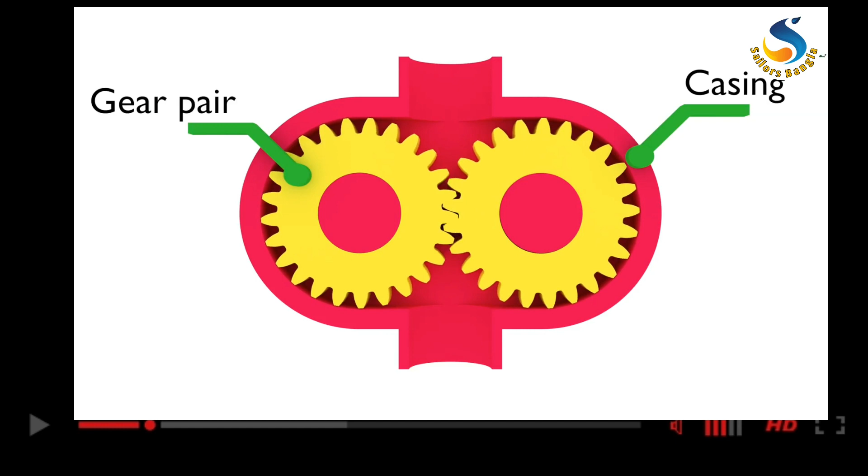Next is the gear pair. These gears may be spur gears, helical gears, or herringbone gears. Helical and herringbone gears always have more flow at high speed compared with spur gears. This gear pair is externally meshed, of which one is the driver gear, mounted on the shaft of the prime mover, and the other is the driven gear. The last part is ports.

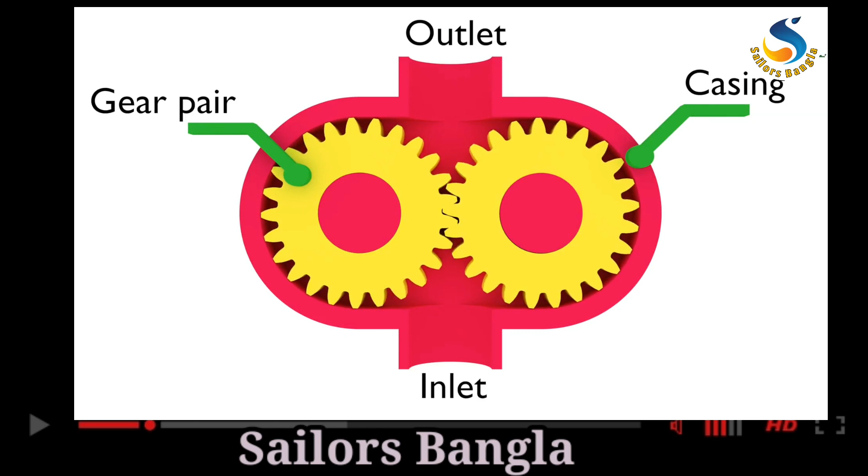For suction of oil into the pump, the suction or inlet port is provided. The delivery port is provided to supply high pressure oil. These two ports are located on opposite sides of the gear case. Well, now let us see how it works.

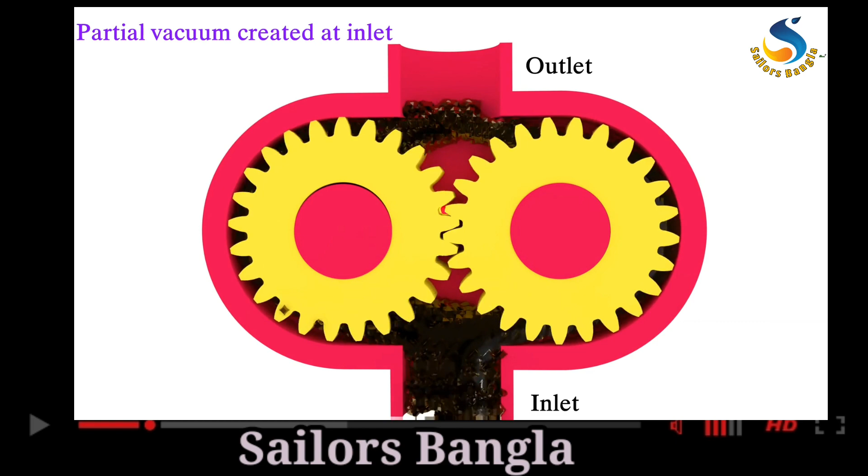When the motor or prime mover is started, it will rotate the driver gear and then the driven gear. The unmeshing of the rotating gears takes place at the inlet, due to which volume increases and a partial vacuum is created. So the oil present at atmospheric pressure will enter the pump. Now the entered oil will get trapped between two gear teeth, or in the space between the casing and gear tooth.

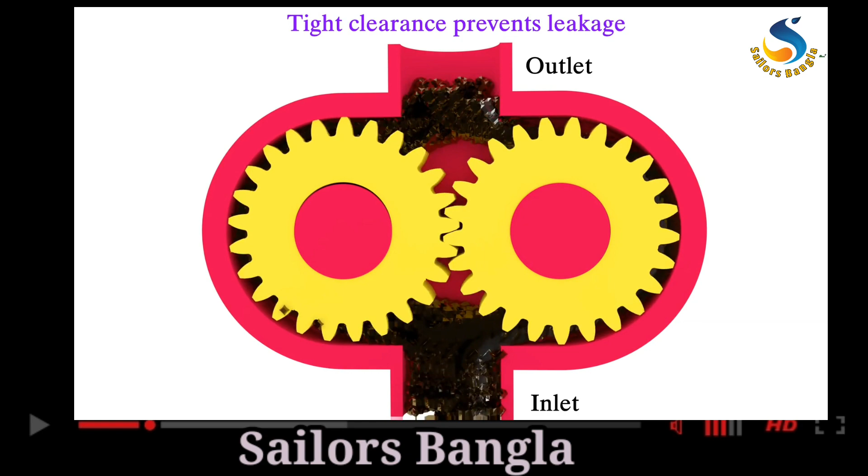Please note that there is tight clearance between the gears and casing, along with the high speed, which results in preventing leakage. At the outlet port, meshing of gears takes place, due to which oil is forced out at high pressure through the outlet port. Oil never flows through the gap between the two gears, and the close tolerance also helps to prevent leakage from the outlet side to the inlet side.

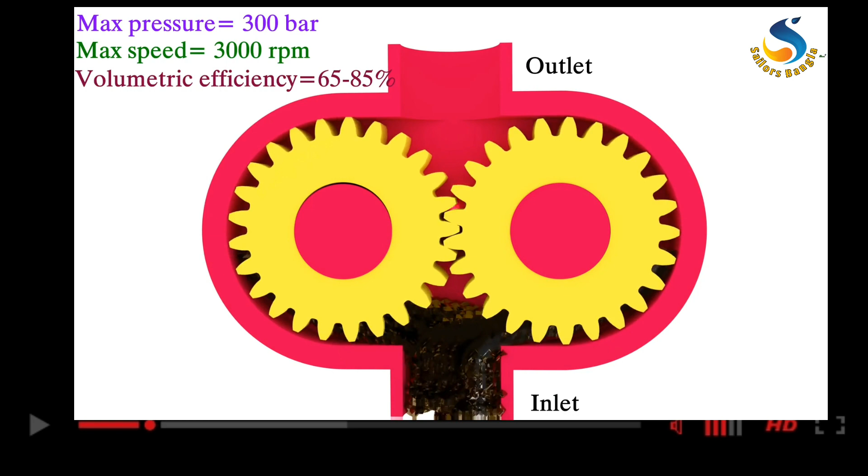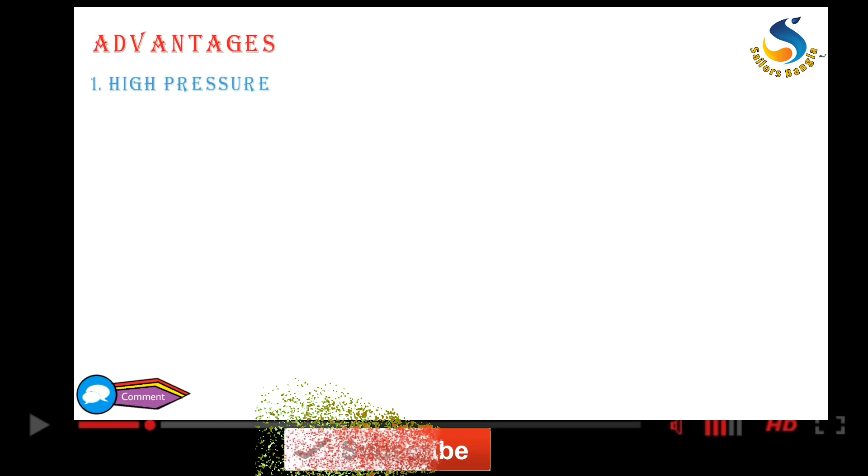This gear pump can work up to 300 bar and the maximum speed is 3000 rpm. The volumetric efficiency of this type of pump is about 65 to 85%. Now let us see the advantages of the external gear pump. It can create high pressure and can be used to pump viscous liquids.

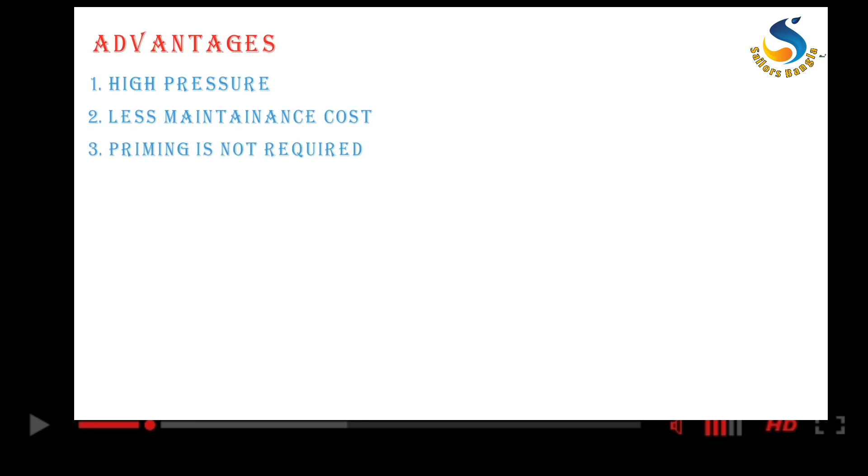It has few moving parts, hence maintenance cost is minimum and wear is also minimum. For this type of pump, priming is not required like in centrifugal pumps. The construction and design are simple. The external gear pump is cheaper than vane and screw pumps.